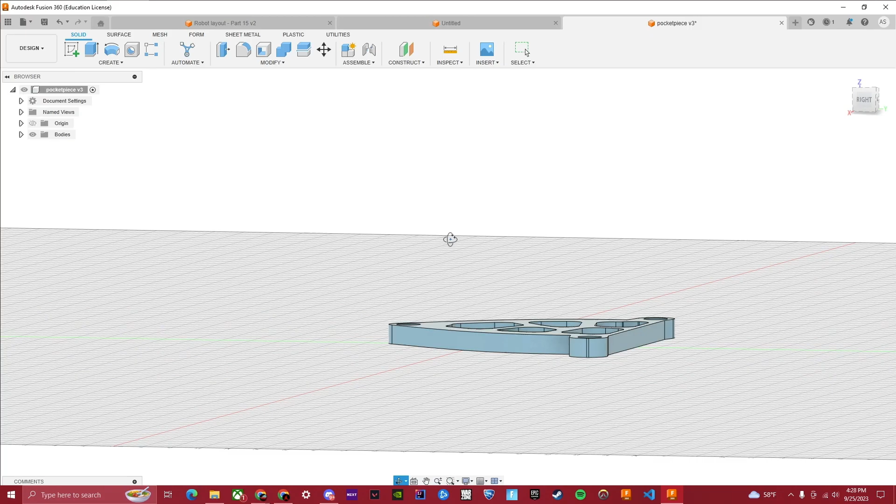Let's get started. So this is the little practice piece that I'm going to be using to demo for you guys. But one very important thing to note is the orientation of this piece. We want to make sure that this piece is lying flat on the top plane like so. And when you click this little top face over here, you should have a bird's eye view of your piece, and it should almost appear two-dimensional.

Right? So once your piece is oriented like so, now we're actually going to be generating the G-code. So if you go to the top left, we're in the design workspace, but what we want to do is go to our manufacture workspace, right? So now we're here, and we're going to click above setup. There's these two things. We're going to want to click setup under the milling category.

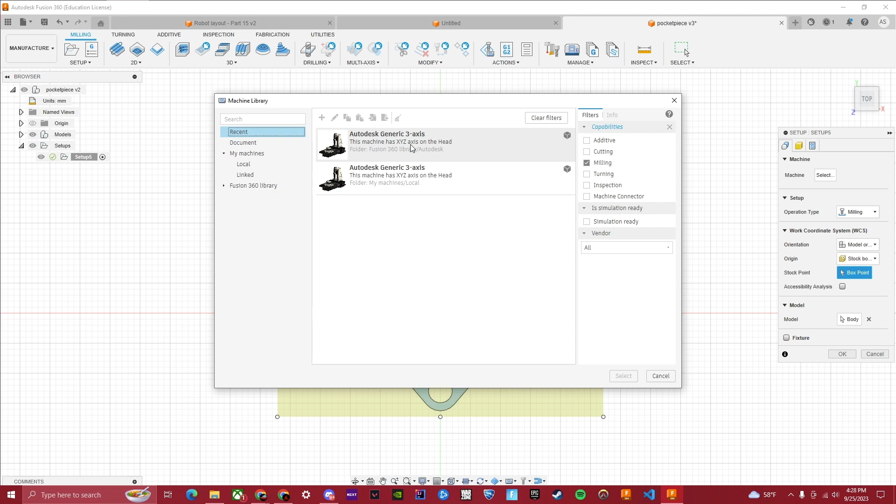We're going to select our machine. So I already had it selected before. I'll show you guys how to do it again. For me, I've been cutting for some time, so this is already here for me. You guys might have to go to local or the Fusion 360 library, but this is the one you want to select: our Autodesk generic 3-axis, and it should look exactly like this. Fusion 360 already has it.

You might have to download the model. That happens sometimes. So just save that. Sure. This happens sometimes. Just wait for that. Awesome. So now our machine is selected. Fusion 360 already gives this to you, but this is the one we want to choose.

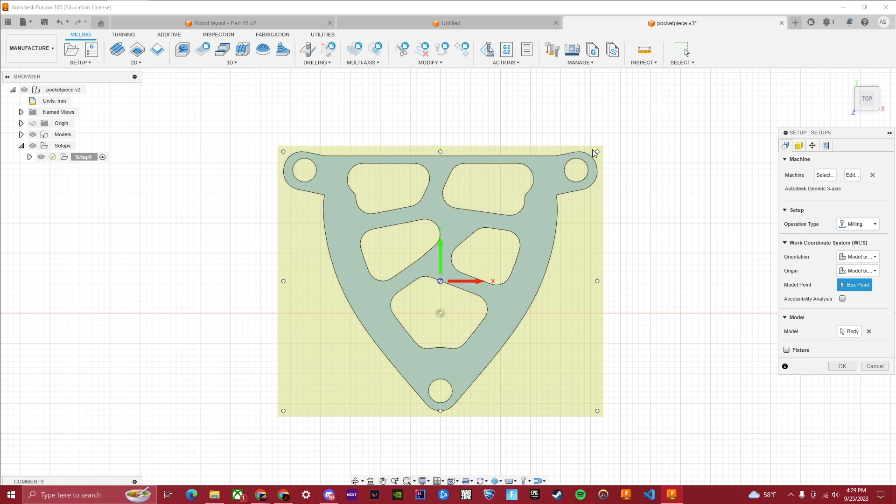So we can leave all of these categories untouched, but when we hit this little origin category, instead of stock box point, we want to click model box point. And we're going to want to select one of these four corners, like so. We'll get to the reason why we do this, and you'll understand the use of it later in the video. Just remember to do this for now, as this is kind of what the orientation of your piece is based off of. So we're going to click OK for that.

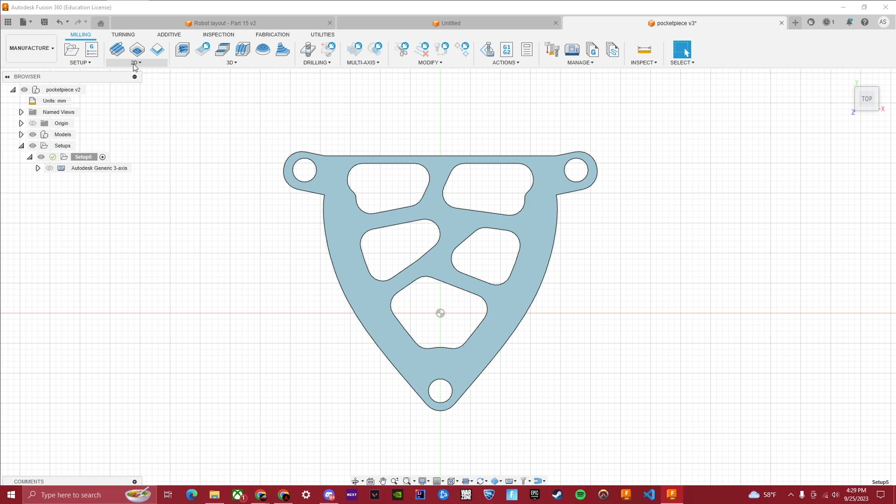Just click the back here if it ever turns like this. Boom. Click this drop down. Click that. And now we're going to start with our holes. So here, let me orient my piece a little bit tilted like this. Awesome. We're going to click the 2D drop down, and we're going to click bore. And first thing we're going to want to do is select our tool. So as you can see, I've already created a tool.

This is a 4mm end mill. So, depending on your machine, you guys are also going to have to create your own tools. And I'll link all our tool specifications and how to actually do that in the description. And it is a flat end mill for those of you who have to create your tool.

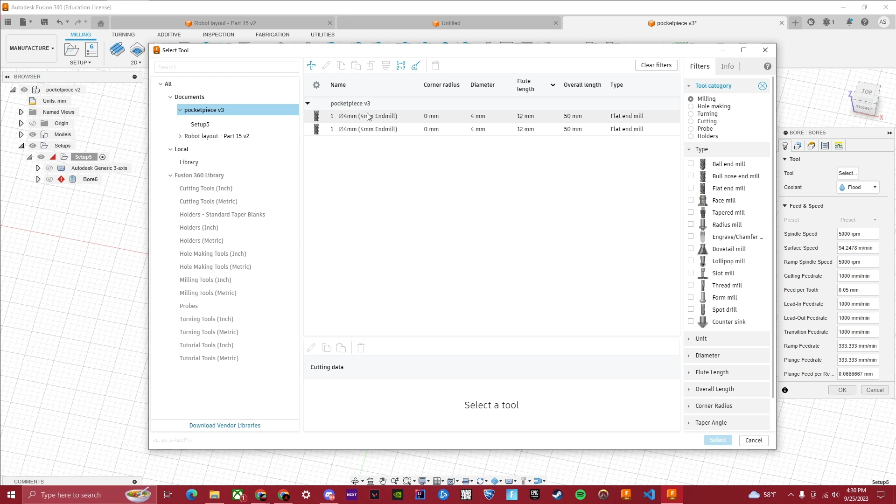So I'm just going to click this. We already have all our data from our machine. Once again, I'll link all of our data. There's a little short video, and I'll link it in the description. And you can also use it for different parts. Right now it's just aluminum. We also have a polycarbonate subcategory, which has these different settings. So we're just going to select this and click that.

So now our flat end mill is selected. We don't need to touch any of this. It'll do it by itself. And we're going to go to geometry. Now we're going to want to select our holes like so. And now you can see that our holes are selected.

Now that you've selected all the holes that you want to drill into, we're going to move on to this tab over here, heights. And we have all these values here. And for us, we're going to want to change these. So instead of 10 for our clearance height, we want 15 for our offset. And instead of 5 for our retract height, we're going to want 7.

Alright. And for our bottom height, we're going to change this to -1. So just for a quick description of what each of these terms mean: our clearance height is the height at which the bit moves to the first cut, and it's going to retract after the last cut. Our retract height is the height to which the bit rises before moving on to the next cut.

Our top height is the height of the top of the piece from the bottom of the metal, and your bottom height is the height of the bottom of the piece from the bottom of the metal. So we put -1 here just in case your metal is uneven. What you should generally do with the CNC is have a little wooden board underneath, just in case your bit goes a little bit deeper than the metal. It's just going to cut into that wood, and it's just a piece of scrap wood, so there's no harm done if it gets cut.

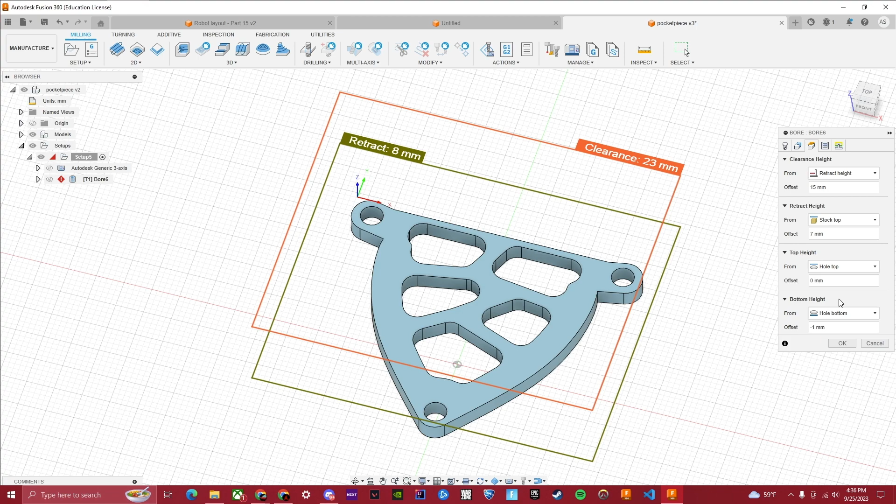So now that we got these, we're going to move on to our next category, which is going to be passes. Now that we're in our passes category over here, we're going to select multiple passes. We're going to change our number of step overs to 1. And we're going to select this as well, our stock to leave, and we're going to change this to -0.01.

Alright. First we'll start with the step over. The reason that we do this is because the bit is going to be cutting at multiple radii around the hole. So we select multiple passes, because you don't want your bit to just go straight down through all the metal at once, because we only want to cut it at one radius measure around the hole.

And for your stock to leave, it's going to add or remove metal from your 4mm hole. So if your bit is 4mm and it therefore can't cut an exact 4mm hole, we're going to want to add an extra 0.01mm to the diameter of the hole. And you can see that I put negative here because negative values denote extra cut metal. So that's just a little bit of information for you guys on there.

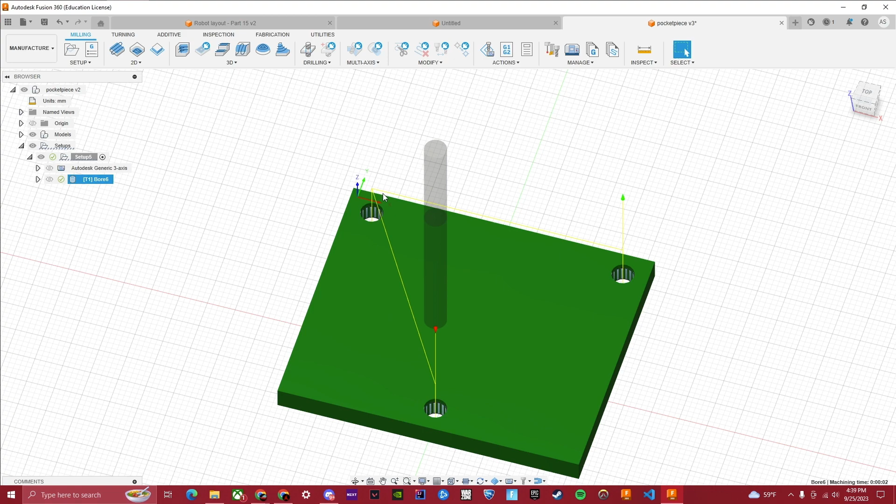And now we're going to go to the final thing, which is linking, this last category over here. We're going to just change all of these categories to 0. Those two. Basically your lead-in is that the bit is going to cut through the metal slightly before reaching the actual piece, and it's going to sweep into this piece. That just wastes metal and is very unnecessary. So we can change all of these values to 0 and click OK. Just give it a second. Awesome. You got your little mini toolpath right here, which you can see through these lines.

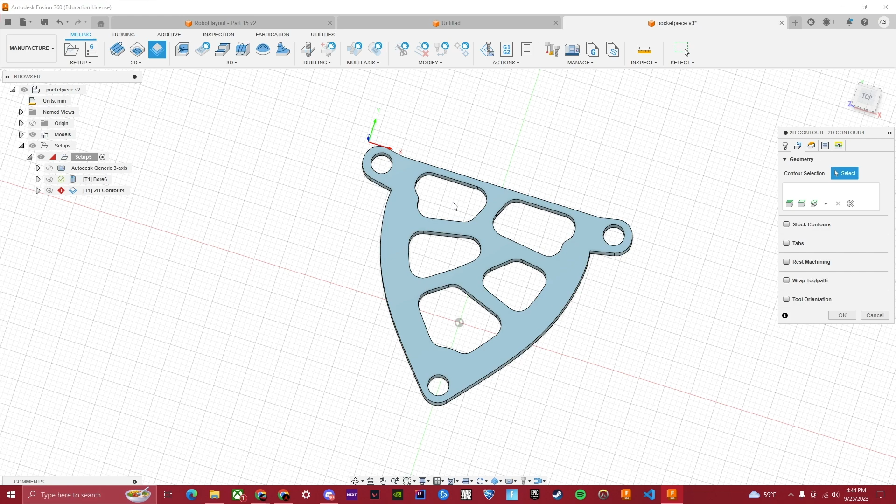Now we're going to work on the pockets. Now that we have our toolpath for the holes of our piece, we still have pockets and outlines to cut. So we're going to go back to our 2D drop down here, and click 2D contour. Alright, so our tool and everything is selected, but when we're in the geometry tab, you guys are going to need to select the underside of each piece. So you can see I've selected the underside of that piece, the bottom of this basically. And now you can see I have all of these pockets selected, and now I can move on to my heights.

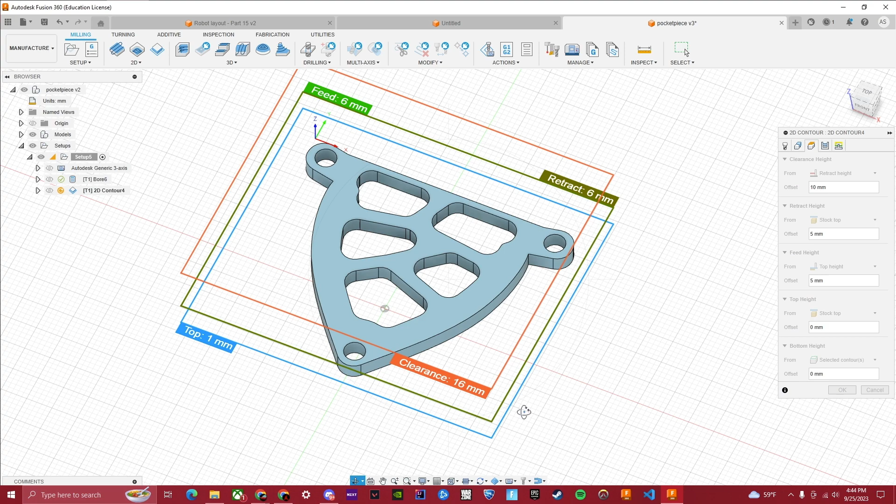And what we want to do is this should just be the same as the previous Gcode file we made. So this is going to be 15, right? And this is going to be 7, and we're going to make this -1, just like we did the last Gcode. Then we're going to want to go to passes, and you can leave all of this here, and we're going to want to click multiple depths.

And instead, for our maximum roughing step down, instead of 9, what we're going to want is 1.05. And the reason that we do this is because our bit isn't just going to drill straight into the 1/8 inch thick metal and just go around. That's how you're going to break a bit. What this is going to do is that ideally it's going to do around 3 to 5 passes. And for every pass, it's going to drop down 1.05 millimeters. So that way it's not directly drilling into the metal.

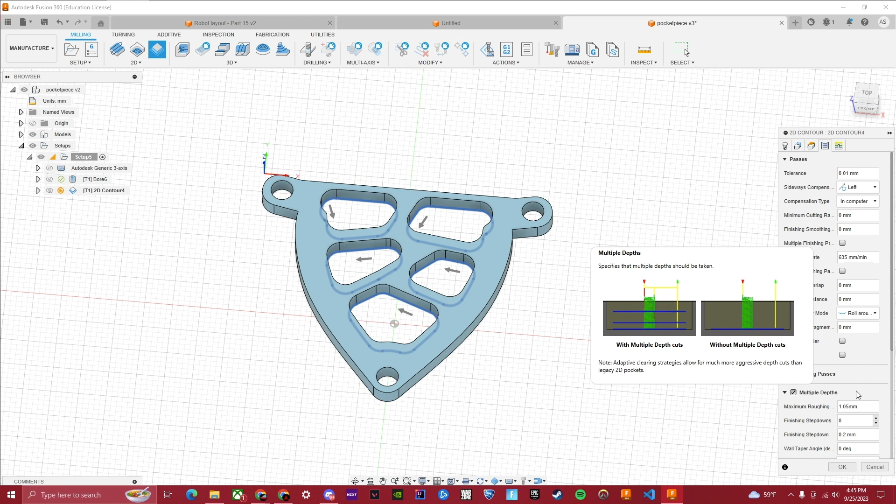And actually Fusion gives a nice little image here. You can see that it goes by increments down into the metal rather than just cutting it straight up. And finally we go to our linking, and we want our lead-in values to match the same parameters as the last one. 0, 0. Awesome. And we're going to click OK. And now we've got our awesome little pocket Gcode right here.

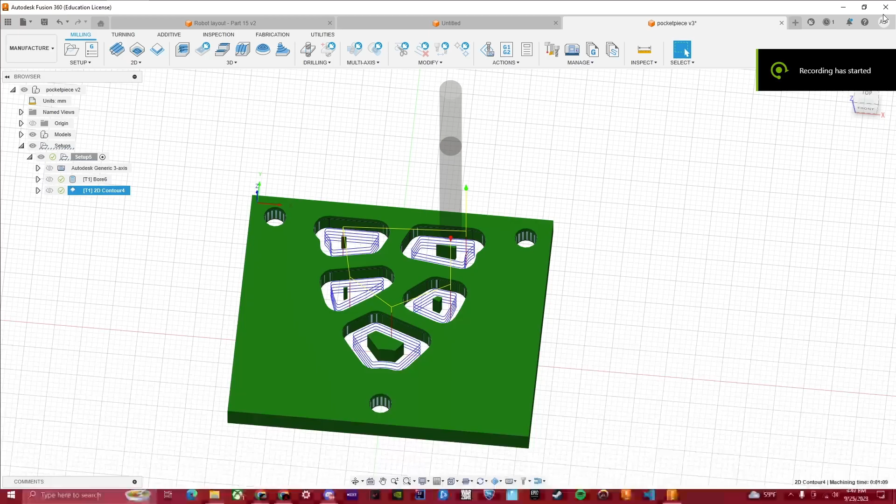Alright guys, so now that we have our Gcode for our pocketing, there's one last thing to cut, and that's the outline of this whole piece. So something clever that you guys can actually do is that since we know that the parameters of all the values are going to be the same, for this 2D contour we can actually just simply duplicate it. So you can see it pops up here. Double click this, and all of these parameters are going to stay the same except for the geometry.

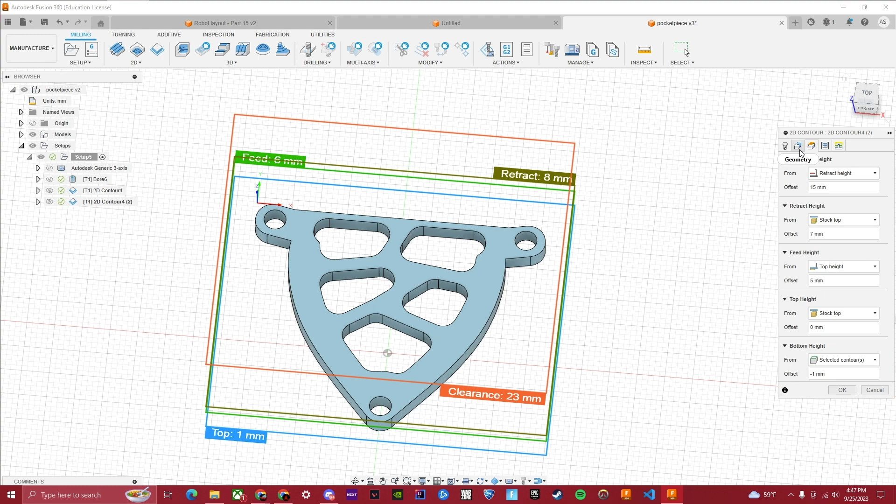So X this out, and now what you're going to want to do is just select the underside of your piece. Just like that. And what's pretty cool is that all your parameters will stay the same. Remember, we already tweaked all of these for what we want. So you can just click OK right after this. And there you have it. That's your Gcode. So now that we have all of these 3 separate things, our bore, our contour, and then our outline, now all we're just going to have to do is post-process or export these.

So we're going to do post-process. You're going to want to change this. Instead of this mock simulation, you are going to want to select your CNC router parts, this machine, and Mach 3 Mill is actually the software that we're using. So make sure it looks like this. And now we're going to change, instead of this, we're going to do holes, right? Make sure all of these values match mine. And we're going to do post.

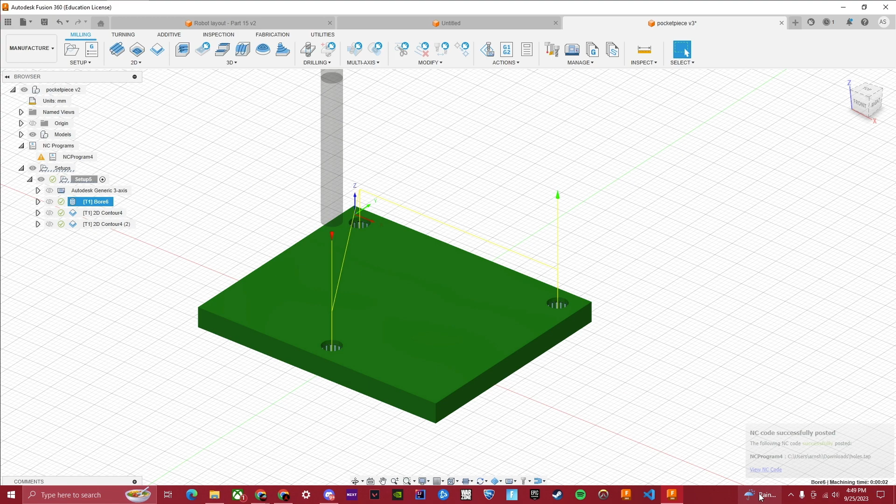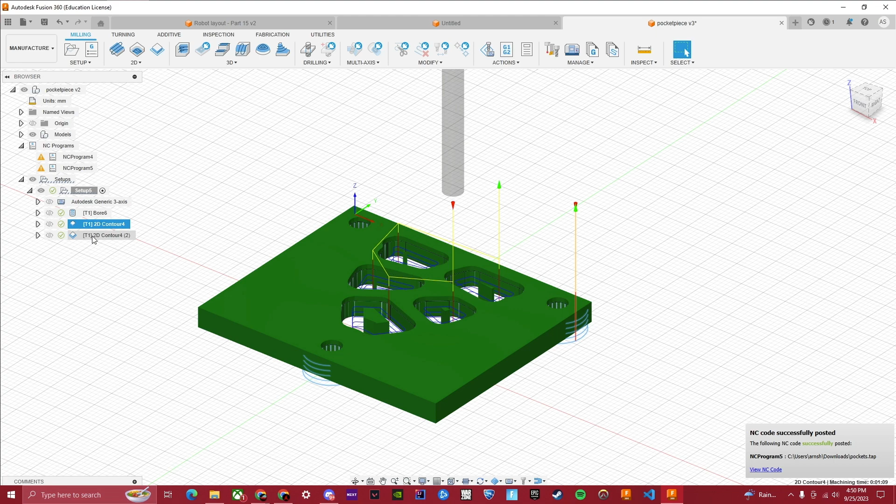Awesome. And then we're going to just do the same thing for all of these. So, okay. Nope, not duplicate. That was bad. Sorry, post process is what we want to do. For some reason, there it is. Once again, change it to this CNC router parts, and then Mach 3 Mill, because that's the software we're going to be using. Change this to pockets. Whoops, can't spell. Pockets, post. You can see it's just going into a file in my computer here.

And then finally, post-process your outlines. And we're going to call this outline. And you got to make sure to select that. And this is just your path. Post. And there you have it. That is how you make Gcode for use with the CNC router.